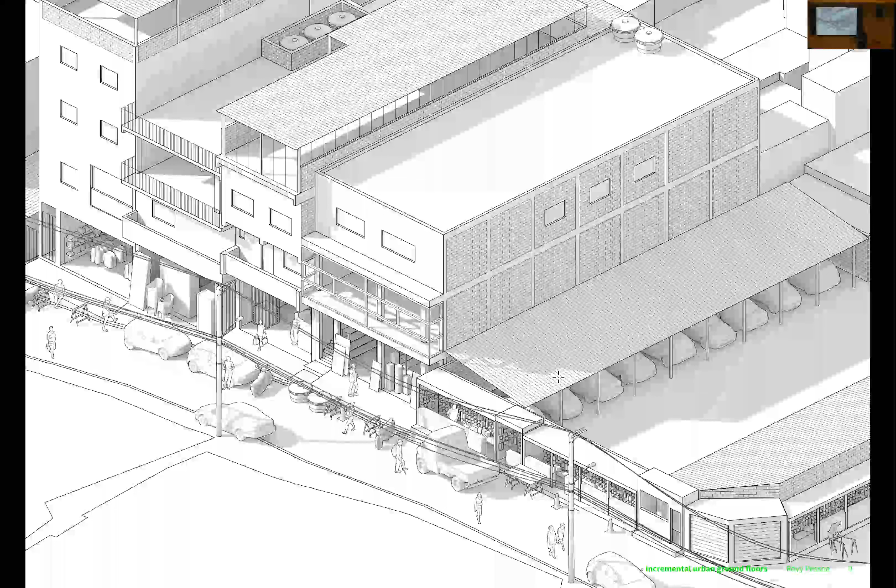So here we can see two paces, two scales of investment in the favelas, both formal and informal. There's the intense core of the favela with large scale businesses and small scale stalls that occupy the sidewalk, and with this dense and thick urban fabric, there is a very real issue with the car presence. So there's a great commercial value, real estate value in parking lots and central parking lots.

And we have the ordinary fabric of the favela with small scale constructions, and each inhabitant adapts to the slope and appropriates the frontage differently, and here we have the more incremental fabric that operates in different rhythms and with a different urban thickness.

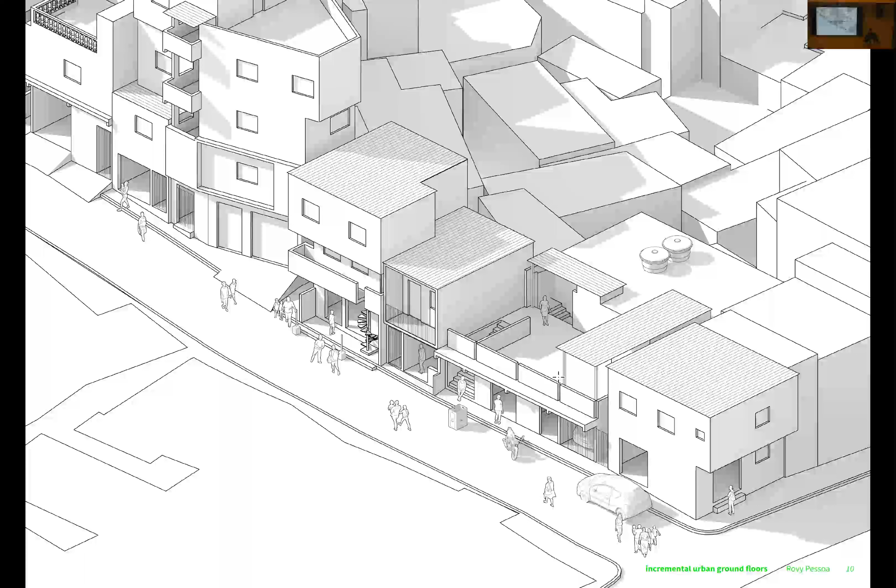So this sidewalk appropriation tells us the importance of the ground floor for social interaction and urban life in this context, as there is very little open space in this urban fabric. So these fronts are often very densely populated, not only by customers, but also by the inhabitants of the core of the blocks.

And we have different strategies to appropriate the sidewalk. The large stores create a void in front to accommodate customers, but the smaller stores literally occupy the sidewalk and take every opportunity to occupy these spaces. So there's a very different thickness of these stores that open to the ground floor, and these openings can be as narrow as 1 meter.

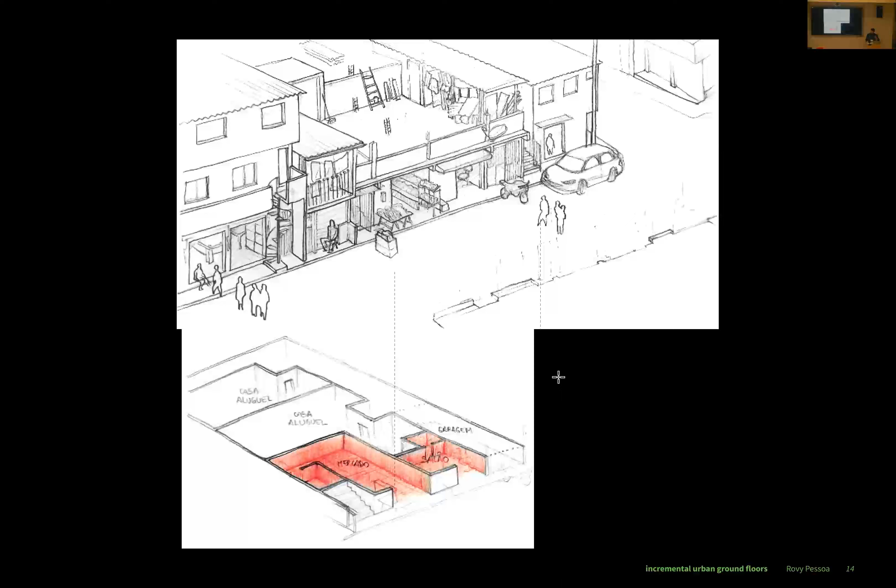And there is an addition process, and we can create and take back these spaces according to family and biographical evolutions. So this creates an urban thickness with a commercial front and residential back alleys and rental housing behind.

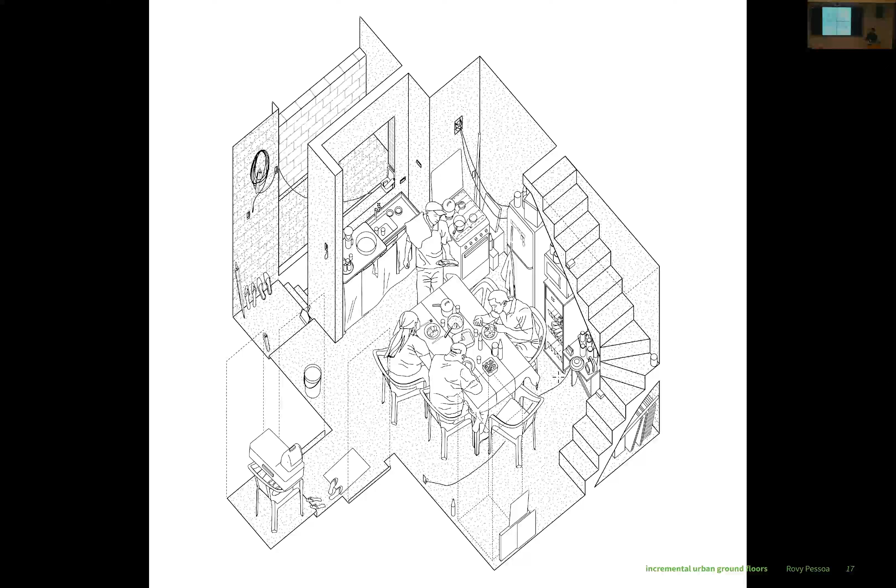Sorry for the transparency, but all this has been conducted with commented domestic walks with inhabitants and informal landlords, with a mapping of domestic itineraries and practices of everyday life, that help to understand the core of the favela as an inhabited construction site, where this permanent construction site coexists with everyday life. Sorry for the colors.

So there's a recomposition, a great typological diversity that tells us that we have different paces of investment, and we can think of a stratigraphic dimension of incrementality that tells a story. And with the surveys, with the interviews, we saw that every change in materiality

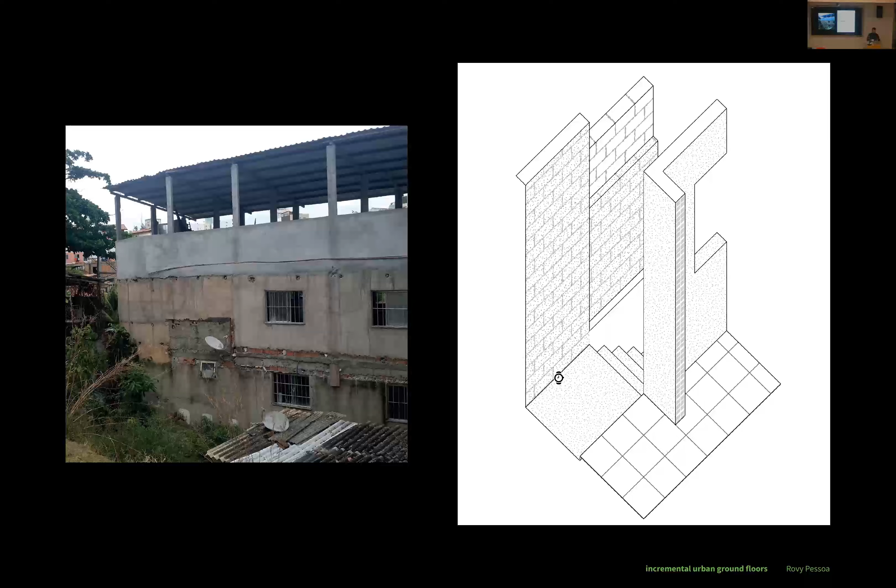tells an interaction story. Here, it began as a window, and through negotiations with the neighbor, the self-builder started building a first wall, a second wall, and as the neighbor didn't want this proximity, it closed itself and formed this thickness. So this incrementality is an addition of urban networks. It's an addition, as we saw, of formal and informal commerce.

It's also to be understood with a vibrant urban life, and there are block parties that bring people from all around the city, but also all around the state of São Paulo. Tens of thousands of people come to this particular favela for these weekly block parties that change the orientation of retail stores, which dedicate themselves to this cultural life in the core of the favela where the parties happen.

And outside, in the peripheries of the favela, we have another kind of appropriation of sidewalks, with storage, gardening and extensions of the buildings. There's a great importance of parking spaces also, and we have parkings that can be rented for parties, for receptions, for community gatherings

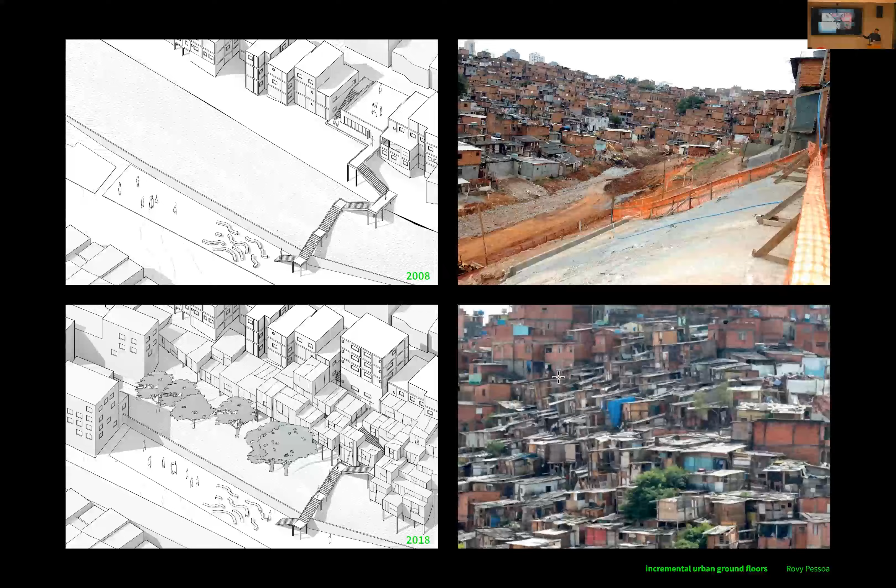And these openings depend on land control, on informal property, informal tenure of the spaces, and there's a real difficulty in maintaining open spaces inside the favela, as this idea of urban space confronts itself with the necessity of housing and this centrality that the neighborhood offers.

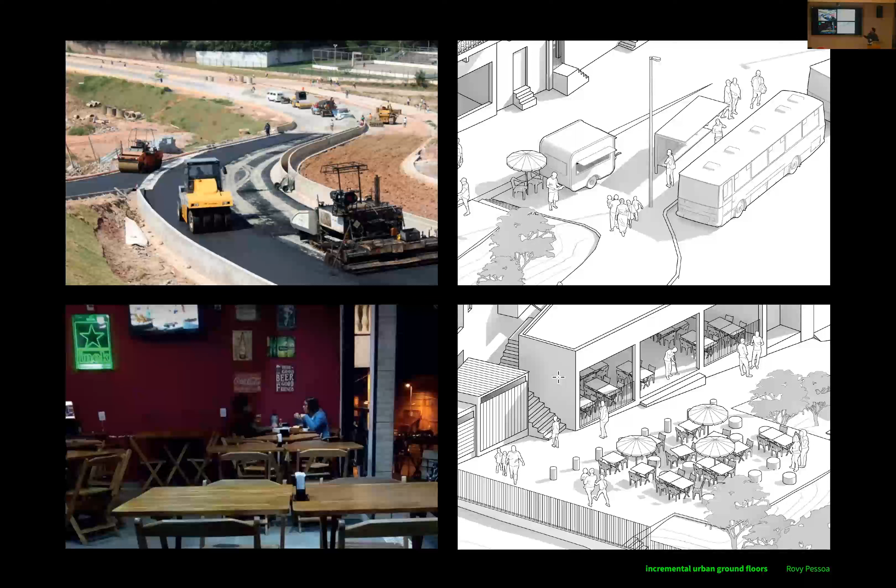So there's a constant reclaiming of open space, and the public interventions, when they create these openings, are faced with this pressure over the open land, and also the creation of new urban facades and new polarities that create opportunities for informal uses and commerce. We see here the new wall that hides the informal neighborhood, and the informal alternative that creates this open Rez de Ville on this avenue.

So to conclude, these new urban interfaces created by urban interventions, these large scale additions that hide the informal neighborhood, help us understand informality as an introverted urbanization process, but one that has an urban thickness that offers also a vibrant urban life.

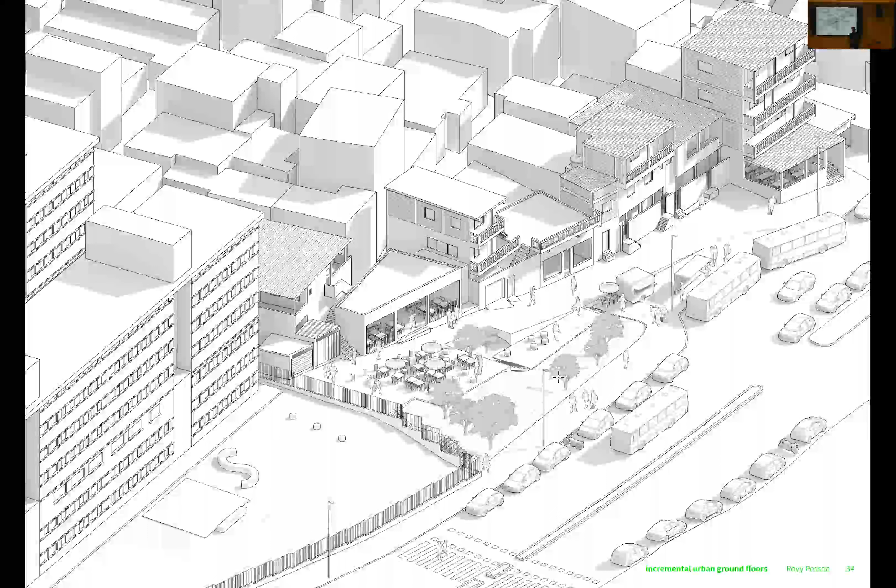These informal petty capitalists, investors linked to other illegal markets in this favela, play a crucial role in leveraging access to informal land. Through this typological look at informal or precarious building production, we can localize and identify this new scale of investment, and that sheds light on the differences in rental prices, how political negotiation happens, and the network of actors inside the favela.